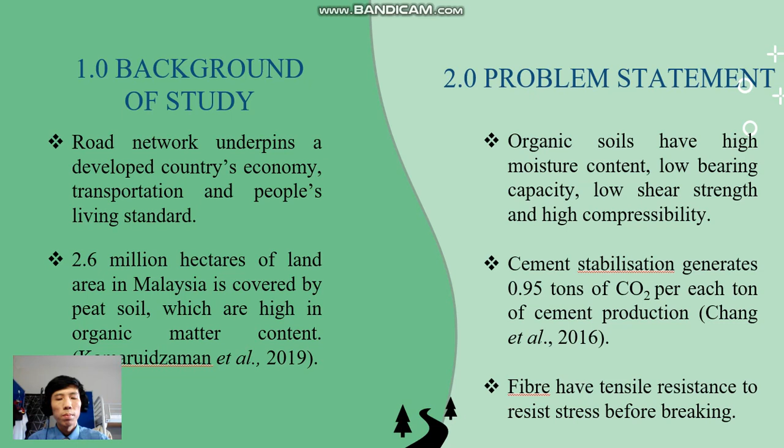For this study, the objectives of this research are as follows. Firstly, to formulate the optimal calcium-based binding agent dosage for strength enhancement of organic sand. Secondly, to determine the shear strength characteristics such as cohesion and resistance between particles of the stabilized organic sand with field application considerations.

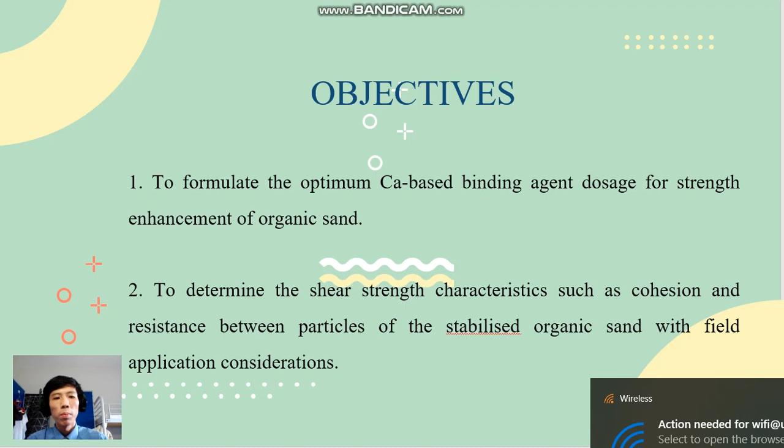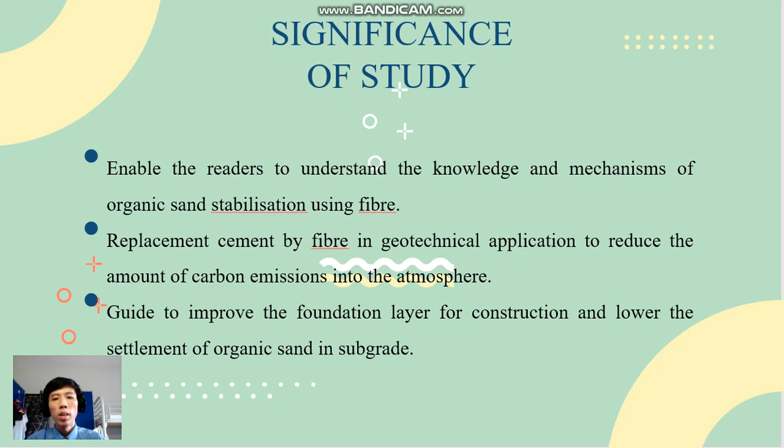The findings of this study enable readers to understand the knowledge and mechanisms of organic sand stabilization using fiber. The result of this study can be considered as a replacement of cement by fiber in geotechnical application to reduce the amount of carbon emissions into the atmosphere. In addition, this study can be used as a guide to improve the foundation layer for construction and lower the settlement of organic sand in subgrade.

Next, the scope of study is focused on the stabilization of organic sand by using fiber as a stabilizing agent. Secondly, the polymer modified cementitious chemical stabilizing agent incorporated with fiber is provided by Reinforce Soil Engineering Sdn Bhd. 3 main laboratory tests, which are direct shear tests, unconfined compression strength tests, and vane shear tests, are conducted in this study.

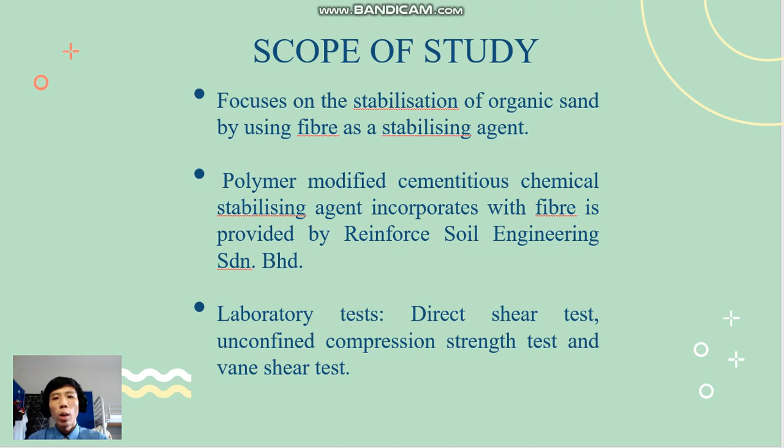Moving to the next content, which is the literature review. According to the Public Works Department of Malaysia, the plasticity index of the sub-base layer cannot exceed 6. Hence, problematic soils are unsuitable to be used as fill material for road sub-base as they have high plasticity index values ranging from 10 to 61.

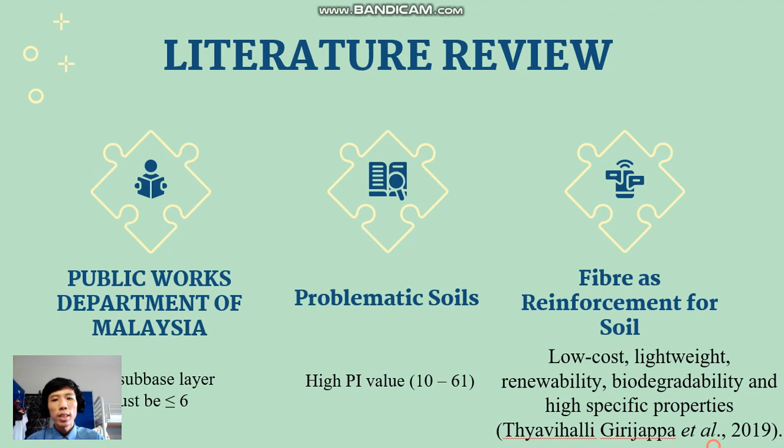The utilization of fiber as soil reinforcement material has been given attention according to studies conducted by the researchers stated on this page. Fiber has low cost, lightweight, renewability, biodegradability, and high specific properties. Therefore, this study will take the chance to further study and investigate the effectiveness of fiber.

Next is the methodology of the study. The infographic shows the research process. The stage starts by identifying the research problem and objectives, literature review, and methodology. After that, the materials used will be collected and prepared. Numerous laboratory tests will be conducted in this study, which are standard Proctor compaction test, specific gravity test, Atterberg limits, direct shear test, unconfined compressive strength test, and vane shear test. All the data will be analyzed and discussed after that. And finally, a conclusion and recommendation will be made.

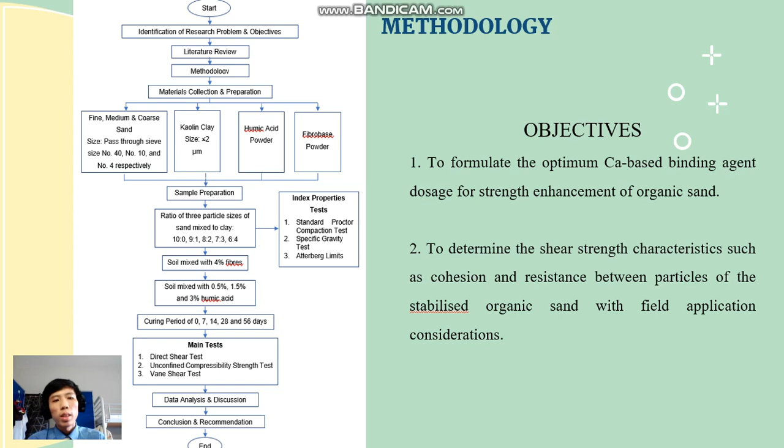The aim of the laboratory tests will comply with the objectives stated in the previous slides. Next is the sample preparation. The table shows the combination of mixtures with different percentages, and this combination will be repeated by substituting different types of sand, which are mixed sand, coarse sand, medium sand, and fine sand. 5 specimens per set were prepared for curing at different curing periods, set to 0, 7, 14, 28, and 56 days. Experimental tests were conducted upon reaching each respective curing period.